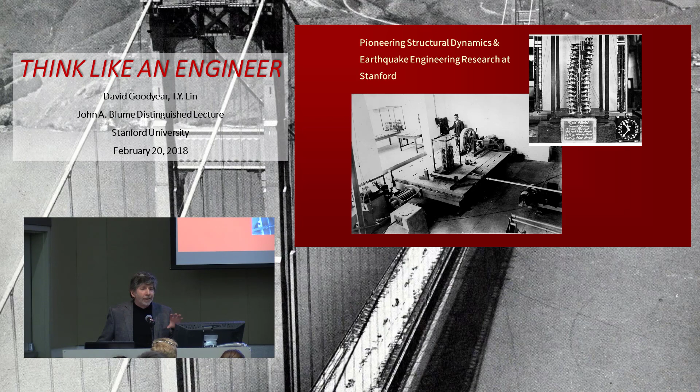And interestingly, when I look back at that shake table, the first applications for that were actually not for structures, but for some of the reclaimed earth that had large deformations around the bay fringes. So some of the earliest studies were looking at what we now call ground deformations and liquefaction. But John Blume, along with a number of other students at the time, worked with a faculty member from mechanical engineering, Lydik Jacobsen, who's really a specialist in structural dynamics, and introduced, I would say, rigorous structural dynamics into earthquake engineering, and also thinking going beyond elastic to inelastic behavior. And if you talk to Professor Miranda, he still goes back to many of the Jacobsen and Blume papers of that era.

As I mentioned, John Blume formed John Blume Associates, which later became part of the URS Corporation. Nowadays, it's part of an even bigger corporation, AECOM. But shown there are just a few of the very interesting structures that Blume Associates were either involved in the design of, or were involved in special studies, particularly aspects related to state-of-the-art earthquake engineering and dynamics, or things that were beyond the ordinary practice. I think in addition to these interesting projects, Blume Associates had a number of alumni, that is, people who worked there as young engineers who went on to fabulous careers of their own.

People like Eric Elsesser, if you know the firm Forell/Elsesser. Eric Elsesser's first job was with John Blume. Someone I worked with years ago in New York, Les Robertson, who designed the World Trade Center. His first job was with John Blume. Sig Freeman, who founded the company, or the office of Weidlinger. So there's this alumni of amazing people that came through Blume's office, in addition to the ones that stayed. Marty Zarnecki and Joe Nicoletti continued to work with John.

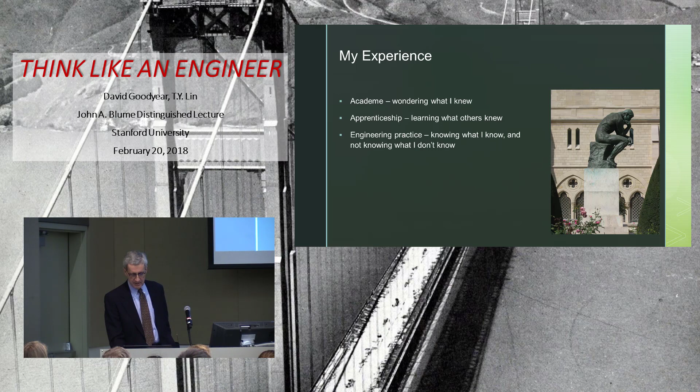I was very lucky to have a mentor when I went into bridge engineering. Actually, I'm a bridge engineer, which is a credit, I guess, to my wife, because I was getting ready to go back to graduate school, and she was not interested in me going to graduate school, so she actually saw the ad in the newspaper that Arvid Grant had. She handed me the ad and said, "Go talk to this guy and see if he can convince you that you don't need to go to graduate school." So, and he did. I went in, I expected to spend a half hour, and 4 hours later I had a new job and never looked back.

He was educated as an architect, a Latvian architect, and he came here after World War II and set up a practice as an engineer. He first worked for the State Department of Transportation, and that was not exciting enough for him, so he walked out the door one day and set up a practice by himself. I remember him telling me that he was a bit naive. He set out a shingle and he thought people would come and knock on the door and give him work, and it wasn't long before he figured out that it didn't work that way and he had to go out and find the work.

He was a brilliant individual, and he probably defied my early example of not doing what you are not expert doing, because he did mechanical design for the timber industry out there. He taught himself to be a surveyor, which is rather arcane practice actually, of understanding local survey rules and things, and he had a survey practice.

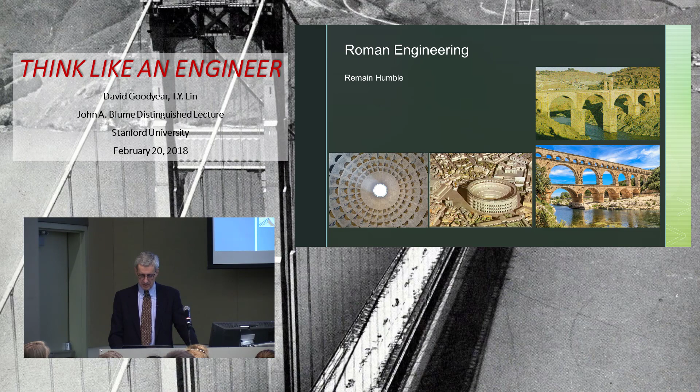Brunelleschi's Florentine Dome is kind of a favorite, mostly because I still look at it as a brain teaser. I was mentioning to some folks at lunch that there are people there even today, or certainly in the last few years, that are trying to build miniature models of the Florentine Dome to figure out how Brunelleschi got a pile of bricks to form that dome, his 35 or 40,000 tons of brick. And simply how being able to build that was a marvel in its day. Brunelleschi was a generation, or at least a half a generation, probably a generation ahead of Da Vinci, and I think

would be probably in engineering circles might be just as well known as Da Vinci if Brunelleschi wrote down as much of his thoughts as Da Vinci did. Da Vinci wrote down everything, and Brunelleschi wrote down nothing, because Brunelleschi was more concerned about somebody swiping his ideas than he was about leaving his ideas for posterity. But if you like a little analytical project, for those of you that like nonlinear analysis, sit down and figure out how you use the efficiency of structural form to make this arch stand up as you're building it up from the bottom with these rings. I think it's a fascinating subject that really teaches you how spectacular these old engineers and craftsmen really were.

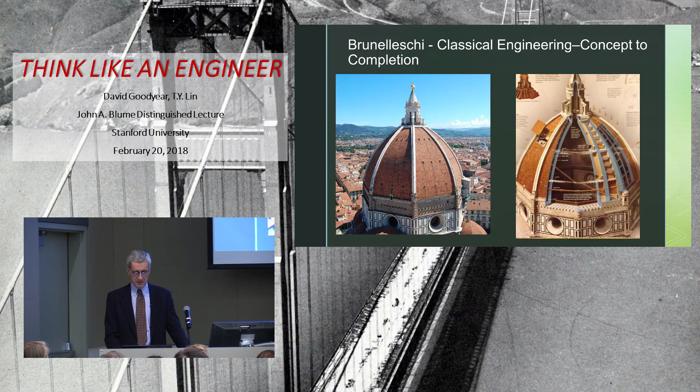And then a little bit more modern, but Gustav Eiffel, and when you look at the Eiffel Tower and you look at that lattice work, realizing the Eiffel Tower was originally built to be torn down. It was built for an exhibition, and they decided they didn't want to tear it down, which is now the icon of France, actually. But the metalwork and the detailing of which is really, from a behavioral standpoint, the tension stiffening that is part of the structure here, similar to his Garabit viaduct. This viaduct he built in about the late 1800s has some lessons even for today. Some corollaries I'll also talk about here in a moment.

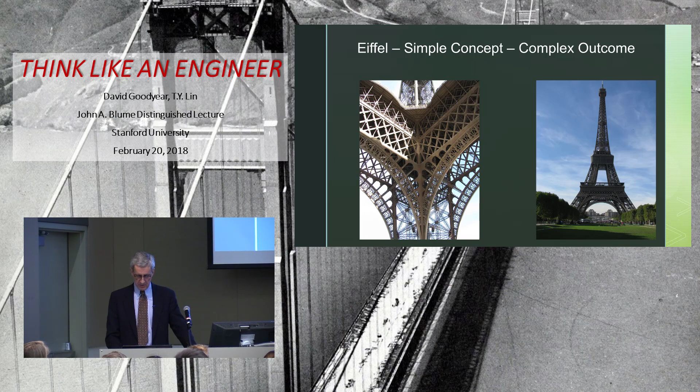As Hoover was being developed, we had a delay in funding that shut the job down for about 2 years after we finished design. And in that time, we put the plans out publicly on the street for contractors to take a look at to get feedback. Obviously wanting to get some input on how we could improve things and make the project more cost effective. We had an outreach meeting once the project started back up, and we had about 100 contractors in the room, contractor staff in the room.

And one of the things when I gave the initial presentation, a few of them had some epithets for me saying that building a 90-meter tall precast concrete column was crazy and that you could never get it straight. Nobody had done anything even half the height, and it was not possible. And I knew this was coming. Had some spies out in the network.

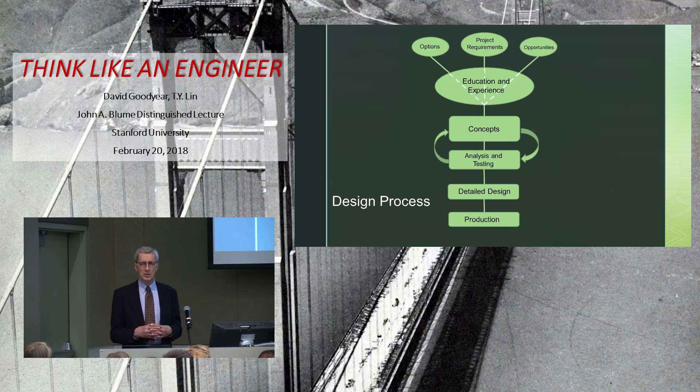At the concept stage, you pretty much defined the economics of your project, of your design, the challenge of difficulty of construction. All of this is really established at the conceptual stage. And then you get into your detailed design. And in your detailed design, oftentimes you'll find out that the assumptions you made in your concept were perhaps a bit oversimplified. And that's where you draw on your analytical and technical capabilities to grind through those surprises, but you're still really developing that product that is established at the conceptual stage. So the conceptual design phase is really where you make or break your project.

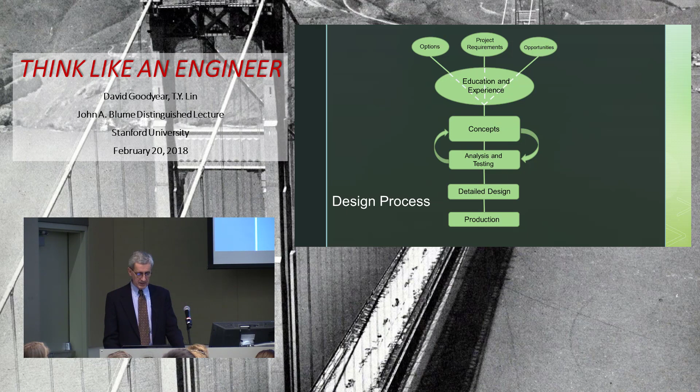Going into some examples, I hope to make the points of this process. I'm going to talk about arches and cablestay bridges because of the long span bridges. That's mostly what I've done. And there are other people that would get up and talk about suspension bridges, perhaps, and other things.

But in terms of arch, of course, an arch is... I explained this. I told Professor Billington I've taught bridge design to 4-year-olds in my daughter's preschool class. So excuse some of the analogies, but arches are like eggshells, and you give a kid an eggshell and tell him to squeeze as hard as he can, and he can't break it. And as soon as he tries to bend it, it breaks very easily. And that's the concept with which you approach an arch design in terms of efficiency. It was the first long span bridge form.

Historically, the bridge on the top in China is 1,500 years old. It's one of the first open spandrel arches, and it's still in service. There are a variety of layouts. The classic parabola is at the top, and the cathedral arch, which is basically an interior pier in the form of an arch, has a compound circular shape, and the funicular curve, or the balance of arches, are load fit. I'll explain the funicular curve in a minute, but all of these shapes are geared towards minimizing bending moment and maintaining the efficiency of form.

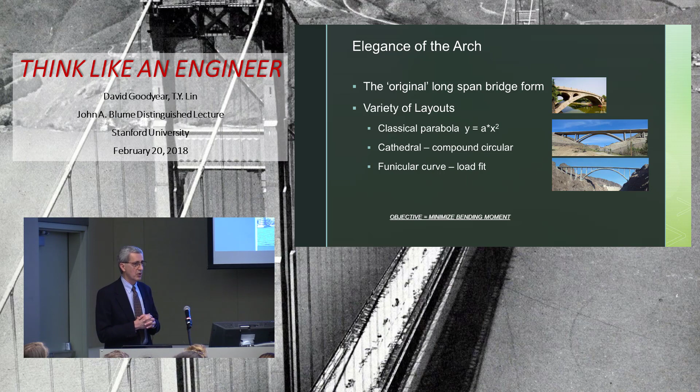In terms of that efficiency, one of the elegant solutions for arches is called the network arch. This Brandanger Bridge on the right is a contemporary bridge designed a few years ago. The one on the upper left was designed by an individual by the name of Per Tveit. He's a professor in Norway who happened to have, I believe it was his cousin, I don't remember, his cousin or his brother-in-law, he told me, but that was the highway director, though they're not called highway directors in Norway, who let him build this bridge because nobody else would.

And he developed this network concept, and the network concept is you have to have each diagonal hanger crossing two hangers, and when you do that, you find that the buckling stability of the arch is enormously enhanced, with the same kind of implicit tension stiffening that you saw in the Eiffel Tower, and basically a system strengthening. If you're disturbing the arch in one area, through displacement compatibility of these hangers, you're actually going to pull the arch and add to the stability of the arch. Because obviously one of the ambitions with a steel arch is to avoid the penalty that you pay in steel for stability. So if you can get the arch rib to be limited by the strength of the steel, then you've got an extremely efficient structural system, which is what he developed.

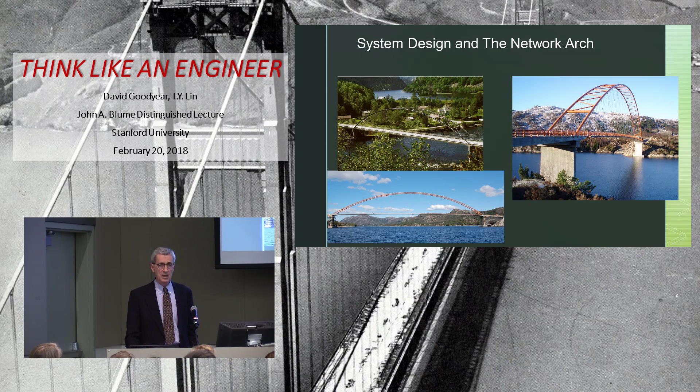Now, obviously, maybe not obviously, one of the challenges with this type of bridge is how do you build it? Because while the network arch is extremely efficient as it's put together, putting it together and getting it out there is another matter. This Brandanger Bridge was floated out as a unit. Tveit's bridge was built on falsework. But in terms of ultimate design efficiency, that system approach, the concept, has been extremely efficient. And there are bigger arches being done. These super light bridges are all two-lane bridges, which obviously you have less demand on a two-lane bridge. But even today, there's quite a number of network arch bridges being built in the U.S. that take advantage of this type of system design.

Going back almost 100 years now to the days of Robert Maillart, he had a very similar system design approach to concrete bridges, where if you look at how slender the arch rib is, you wonder how you can deal with buckling. Robert Maillart, who ran pretty simplified calculations, mostly hand calculations, realized that there's displacement compatibility between the arch rib and the deck, and the deck is stiff enough. The arch doesn't need flexural stiffness, so basically he could design that arch rib as a pure compression member and built the arches in a reticulated fashion. And a modern rendition of that is from Christian Menn on the right, where you can see, just because of the view, the linear elements between the spandrels, the reticulated

configuration, which if you look at, actually the curve on the right is taken from the numbers in the older Professor Billington's book on Robert Maillart. But the principle applies universally. The optimization on the right is simply for a rectangular arch rib and a relatively narrow deck because of the ratio between the influence of the deck and the arch. But on the left, you see that the arch moment ratio depends, no matter if you take this into account and analyze or evaluate your arch as a system, it's a universal principle. Whatever your stiffness ratio is, it drives the moments.

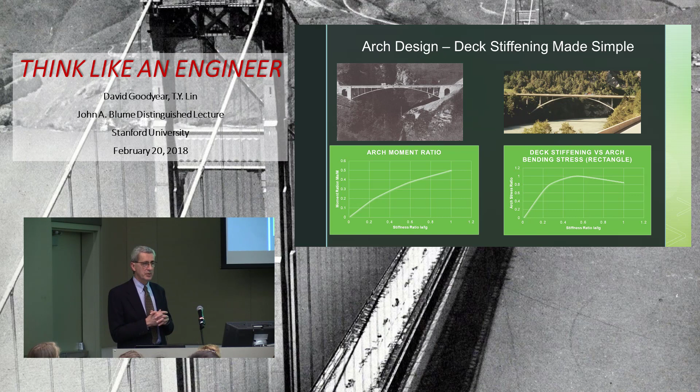So in both of these cases, looking at this funicular curve for a deck arch, it's pretty simple to develop. The equation here is based on assuming all the loads are vertical, but you can modify it for the inclination of the arch. And you're basically following the moment diagram at the point of your spandrels so that you have zero moment from whatever permanent loads you assign, and get a theoretical profile that is free of moment.

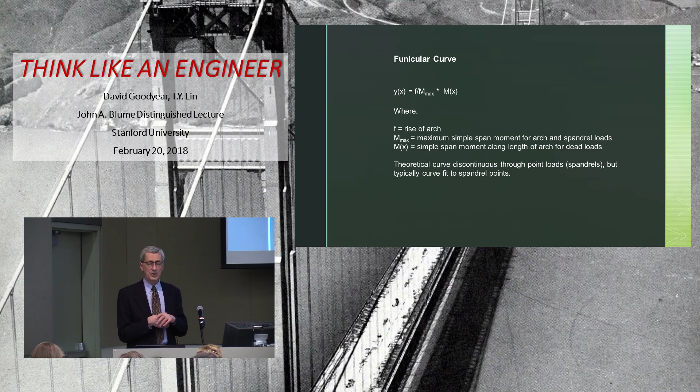Having an arch made out of concrete, that doesn't last very long, which I'll show you about in a minute. But this theoretical curve, for instance, for the Hoover Bridge, which was laid out this way, the arch rib was, for other reasons, quite a bit heavier. So counting the arch rib itself in with the deck and looking at all the weights, the funicular curve varied from the parabolic curve by about 2 feet in certain locations. But it basically was designed to have this same target of zero moment.

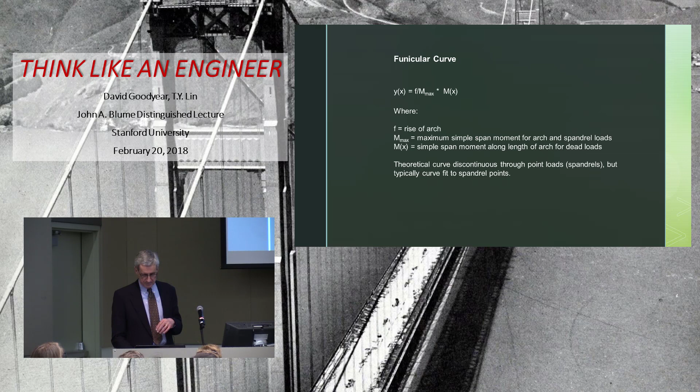In looking at the form and the concept for Hoover, just by way of background to how sometimes you stumble into your answers, the Hoover Bridge was being put together. We were putting together concepts. This conceptual stage was going on at the beginning of the project when the geophysicists, the geologists were out scouring the landscape around Hoover Dam. If you've ever been there, it's kind of like a moonscape. There are just rocks and scarps all over the place.

And the geologists mapped all the scarps for miles around, and they decided that they were going to connect them all with a line and define that as their fault source. And they came back and they said that we could have a 0.7 G earthquake event at Hoover Dam. And I said, well, first of all, Hoover Dam won't be there if you have that 0.7 G event, or at least none of the facilities will. But while I was skeptical, I was also intimidated.

So the clip on the lower left, which most of you probably don't recognize, is actually the tower that I developed for the San Francisco-Oakland Bay Bridge for the Cablestay alternative, which didn't see the light of day, except for the design of these shear links. The tower, for the Cablestay, was developed to have elastic vertical elements and inelastic horizontal elements. So all of the ductility demand would be taken up in these fuses. So I thought, well, I could try the same thing for Hoover, so that if we had this huge seismic event, I'd at least have a mechanism that I could count on as a ductile mechanism, because putting a plastic hinge at the base of an arch isn't the best idea in the world.

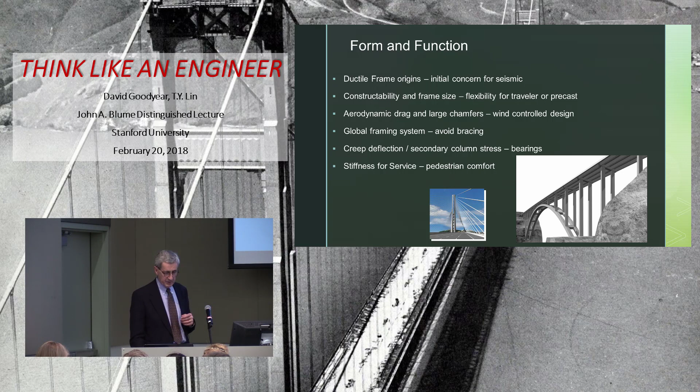There's the last three: the framing system and creep deflection, and the stiffness. We had to concern ourselves with pedestrian comfort, but that was all part of the design here that I'll explain going forward.

The nonlinearity is something I'll mention towards the end, when it comes to dealing with nonlinearity in structural design or bridge design and particularly construction. But the upper right is a quite exaggerated, hopefully, view of the creep in the arch, which is to show the distortion that you get in the columns.

And 100 years ago, when people designed open spandrel arches, if you go back and inspect them now, they all have cracks in the columns. It doesn't seem to bother much of anybody, but today, since we can analyze it and predict the cracks, it bothers everybody. So we put in these expansion bearings to allow the columns to breathe so that we didn't get cracking in the columns.

And Professor Billington actually was giving a paper about the time we were close to being done with this design, talking about a concrete that had high creep coefficient and high creep properties, which would be ideal for this situation. Because the settlement of the arch is time dependent, it takes quite a while, you would just relieve the moment due to creep. But I actually approached Federal Highways about trying that as an experiment, and I was turned away. They said this was too big for a demonstration project.

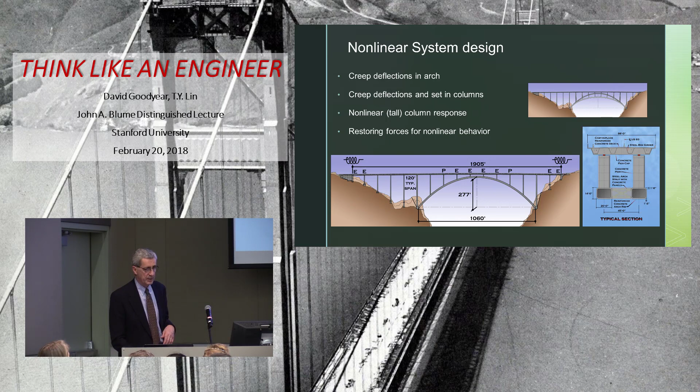And like I say, I'll talk more about that when I get to cable-stayed bridges again, because it's more pronounced in some cable-stayed bridges. Then the deck, there's no bracing in the columns. We didn't want bracing in the columns, so the deck serves as a diaphragm from abutment to abutment to brace the entire bridge, longitudinally and transversely. So we needed to create a diaphragm. So the approach to this was a composite, steel composite deck, and we need to have it continuous over almost 2,000 feet.

The traditional way of doing it would be to build a portal frame and sit it on bearings, but that wouldn't give us the stiffness we wanted, especially the lateral bracing. So we came up with this detail of a post-tensioned shear plate. We didn't use a steel cap because in the bridge community you have something called fracture critical design: if you have an element that, if it fractures, would cause collapse of the bridge, there are a lot of special rules and special expenses that go with it, not to mention the inspection that has to take place every 2 years. So we opted for a concrete, post-tensioned concrete solution.

So then we had to connect the boxes to the cap, and this connection on the lower right is what we came up with, which is a serrated plate, which I'd actually used years before for a very heavy construction load. Shear friction with a steel plate to concrete has good, reliable numbers, if you clean the steel plate. But if you're out in the field and somebody gets oil on the plate or something, there's some concern about how reliable it is. So we had this serrated plate, which worked exceedingly well. And when I used this in the past, you actually could take the PT off of there. There's a draft on the cap so that even if the PT disappeared, the connection would still hold.

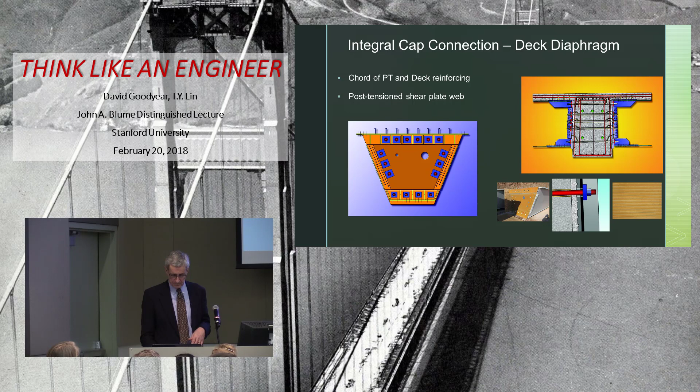In terms of tuning the arch, most arches, even a lot of steel arches, classically when you're ready to close the crown of the arch, you'd put jacks in and jack the crown apart. That's to try and target something closer to a zero moment at the springing, because arches don't like moment, and the efficiency, the material you need to put in, can be excessive.

Actually, it's not entirely clear that even for cast in place arches you really need that always. But here, that was something the reviewers, the Federal Highway people, commented on at the beginning. Since we erected this with stay cables, we could control the moments in the arch rib by tuning cables, and it was pretty easy with these backstay cables, the ones from the tower going back to land, to just pick the whole arch up and pre-camber the moment into the springings.

So we could control that moment, recognizing that creep in the concrete will always creep towards the final statical system. But this was 10,000 PSI concrete, with very low specific creep, a very low creep coefficient. So whether we were fooling ourselves or not, we thought we could pre-camber this and predict that we could target a zero moment. We used a higher creep coefficient than we got out of the testing, so we probably have a positive moment instead of a negative one, but we were designed for that envelope.

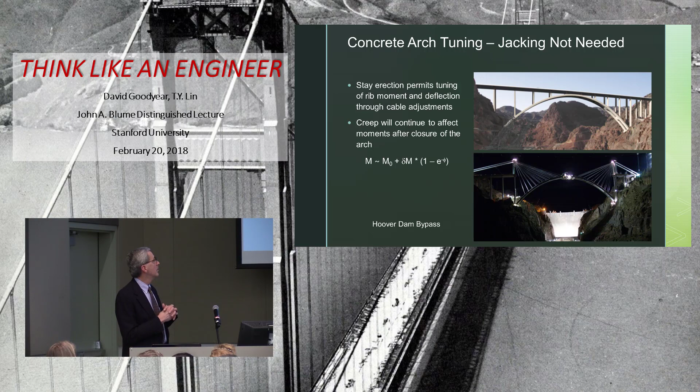This is an earlier arch that we designed in Oregon that also used cable-stayed methods for construction. There are two points I want to make about this. First of all, the integral crown, which is a feature of this arch, would have helped the stability of Hoover perhaps somewhat, although the springs were sufficient in the end. But what we learned on this smaller bridge was that it cost as much to build that integral crown as it cost to build all the rest of the arch.

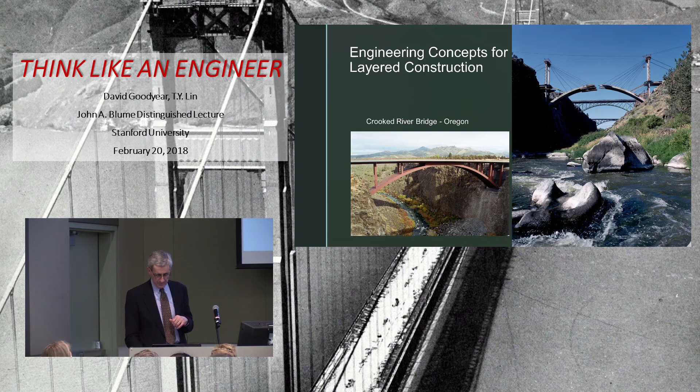So when we got to Hoover, we purposely avoided it. If Hoover would have been a longer span, which was one of the options, we would have needed an integral crown for bracing the arch rib, but for the span we had, we didn't need it. So we had reasons to prefer an open spandrel for Hoover.

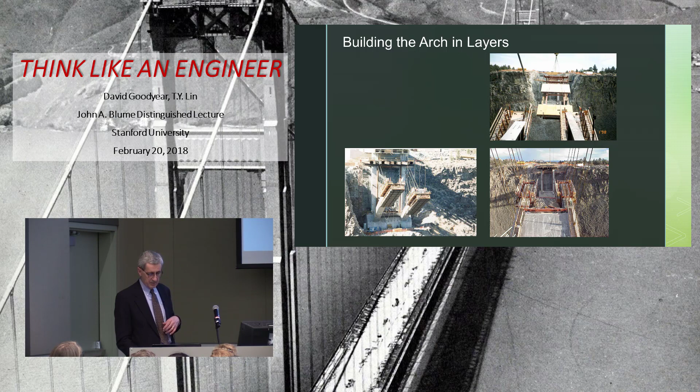But this arch was built in what I call layers and successive castings. It was a trough section with two edge girders and a connecting slab. The arch ribs were built first, the two edge girders on a form traveler with cable stays, and then they just flew in the forms and built the slab later. So if you're looking at it analytically, you don't have the whole section. Again, concrete is time dependent, very age dependent. You don't have the whole section all at once, and you have to figure out how to evaluate the stresses and demands in that type of construction, which I'll highlight at the very end as to different ways of looking at that.

And moving also to cable stay bridges, which again I think fit the theme of thinking like an engineer and making things simple. The cable stay bridge, while it can look complicated, is actually quite simple, probably simpler than an arch in a lot of ways. The analytics of it are complicated because of the high indeterminacy, but the concepts are pretty simple.

There are two approaches to cable stay bridge design in terms of the deck. There are flexible decks, with concrete edge girders like Dame Point and concrete cross beams. Sidney Lanier is that way. There's composite, which is the most popular in the U.S., which is a steel frame system with usually precast decks on the top. And then there's a box girder like Sunshine Skyway in Florida that behave quite differently. The lower one is Kap Shui Mun in Hong Kong, which has a train in the middle. So if you have a train in the middle, you're going to have a double deck. You're going to have a stiff box.

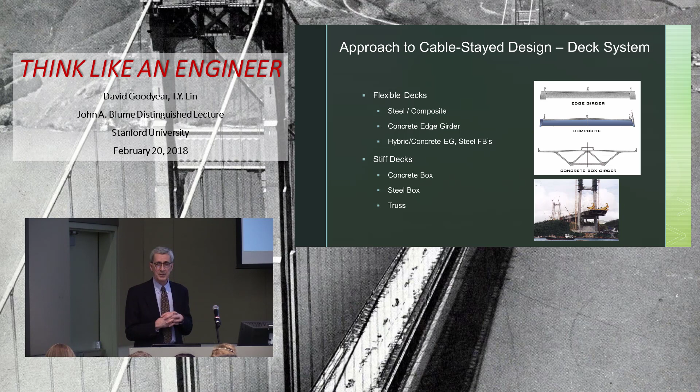But what you have in terms of the merits is that the conceptual approach to the flexible bridge is that the cable in tension is the most efficient element, and you want to maximize the use of that cable and what that cable can do.

The concept with the stiff bridge, with the box bridge, is that you want to actually minimize the demand on the cables and use the properties, the torsional stiffness, for instance, of the box, and the flexural stiffness of that box spreads out, concentrated. If you look at the fatigue demand on the cables on the right versus the left, the fatigue demand on the right is less than half of what it is on the left.

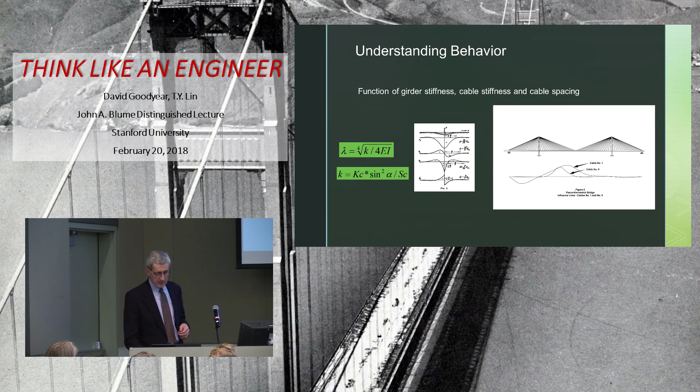Again, with nonlinearity, and this is the main point in terms of dealing with nonlinearity that I want to make. The classical approach to analysis that I'm sure you all use is you develop a stiffness model and you apply forces, and out of that you get stresses and moments and deflections. That's the classical way of looking at an engineering analysis problem.

With a flexible steel bridge that you have to analyze all the way through construction to know where you're going to end up, that just doesn't work very well, because first of all, you might have in the jacks, where you think you're putting a load into a cable, a 3 to 5% tolerance on your jack readings, and you have a very flexible system. And actually in the limit, it's like a weight on a string. If you have a weight on a string, you can pull that string up and down as much as you want, and the tension in that string doesn't change at all.

And that's what happens when you try and erect a flexible steel bridge with forces, is you can't control the deck. So you really want to go into a nonlinear system and turn things around a little bit and control it by displacement. Whether you're dealing with a nonlinear column that is guyed off or tied off, as it was in Hoover, or you're building a flexible bridge, you want to control it by deflections, because as I'm sure you know, if you know the unstressed shape of all the elements in your structure, and you know the stressed shape of your final structure, for a linear material, you know all the stresses in the structure.

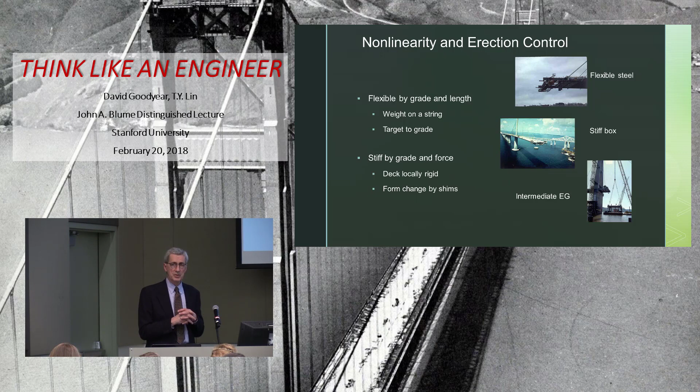Conversely, for a stiff box, you can't move it from its unstressed shape. As it goes together, you need to erect that by force, because if you tried to use the same methods you use for a flexible steel, you'd break the cables. So if you have to make geometry corrections there, it's quite different. With a flexible steel bridge, you can pull it around quite a bit. For a stiff concrete bridge, if you have to change it, if it's cast in place, you have to change the form traveler, or if it's precast, you have to use shims.

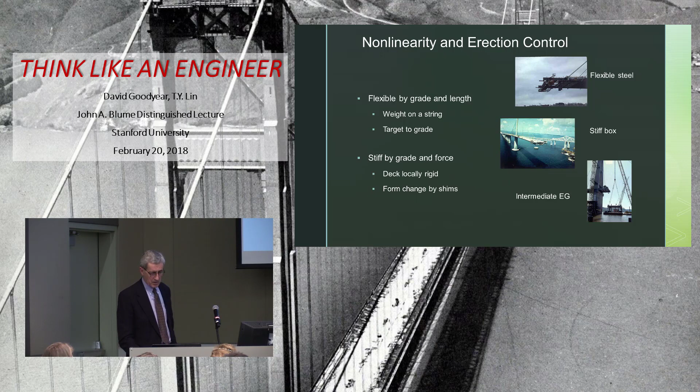Moving on to another project, the last project here is Port Mann. This is a bridge that we did a while ago up in Vancouver, BC. And again, trying to explain how we got to the solution that we arrived at was pretty simple. In fact, embarrassingly simple, actually. This is the layout of the bridge, and up at the top, I hope you can see there are two lines, which was the old bridge.

This was a project where the criteria was they wanted 10 lanes crossing the river. And the concept that the owner put out, this is a P3 or bid as a concession project, the owner said, I want 10 lanes when we're done, and the concessionaire, you have to take care of this for the next, it was 35 years, counting construction. So you keep the old bridge as long as you maintain it and build a 5-lane new bridge.

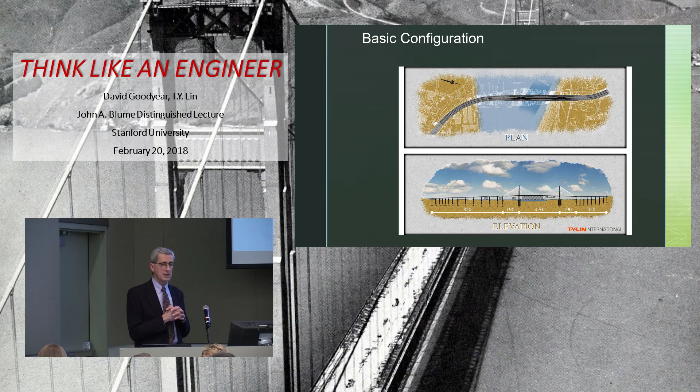Well, we had right-of-way for 5 lanes, and we had to stay within the right-of-way. It would have taken us years to get additional right-of-way and millions of dollars, hundreds of millions of dollars. So we came up with a single tower solution, the purpose of which was to get that footing to fit within the right-of-way. And that's the sum total of the logic behind that concept of building 2 bridges and hanging it off of 1 tower.

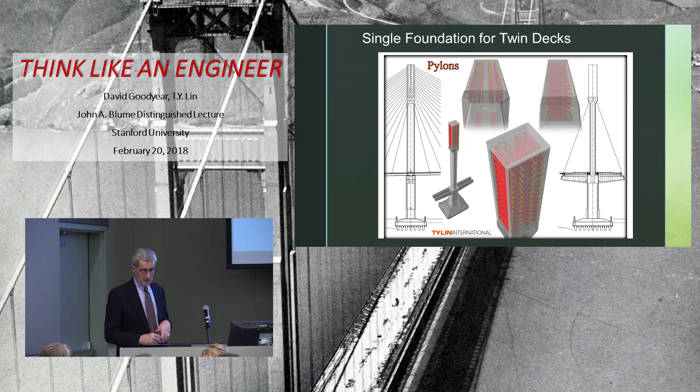It was an interesting exercise to design the tower for 4 cable planes. The geometrics had to change. The tower had to be taller to get traffic underneath the splay of the cables. And there were a couple other interesting engineering items that we had to take care of. But it was basically pretty simple, just 2 decks supported off the same tower with a strut in between to take the splay forces out of the cable, and everything else was very normal. That's why it was bid very competitively, because this was all something that a contractor had built before other than the tower.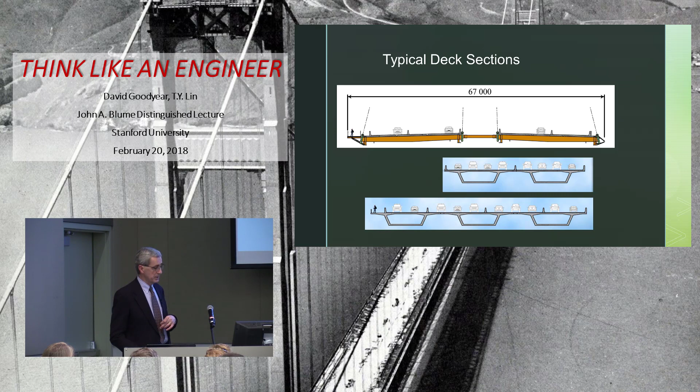And off the ends of the bridge, the approaches are precast segmental boxes, so we split it into 3 so that the 3rd box we could build after we tore out the old bridge, because at the tail ends of the bridge we overlapped with the old highway and ultimately had to maintain service throughout the construction period.

But one of the details that had to be attended to that is somewhat different is the stay anchor for this bridge, for the outside stay anchors. There's 2 types of anchors. Again, this is just like the difference between a slender deck and a stiff deck. There's a semi-religious affiliation with some of these stay anchor types. And the top 2 anchors are called fin-type anchors, where basically the web plate of the edge girder is extended up, either welded onto or bent plate or continuous plate.

The lower anchor, we call it a bucket anchor on the outside, is either a pipe or a steel box that we bolt on to the outside edge girder. If you had to, you could take it off and replace it. But the main issue here is that these lower anchors have to be stiff enough to mobilize the damper on the stay cable. Because if they're too flexible, the damper will just shake with the cable. So you have to generate motion within that damper in order for the damper to work on the stay cable.

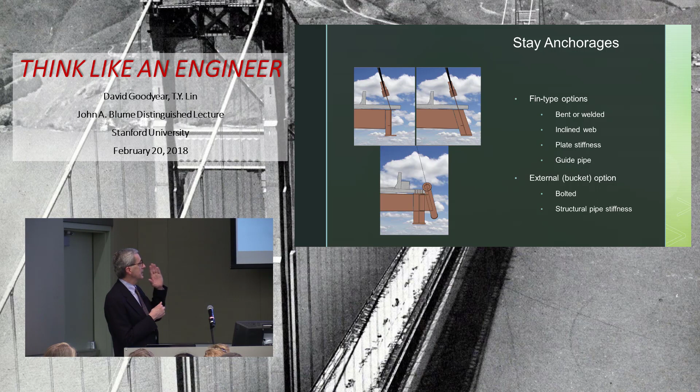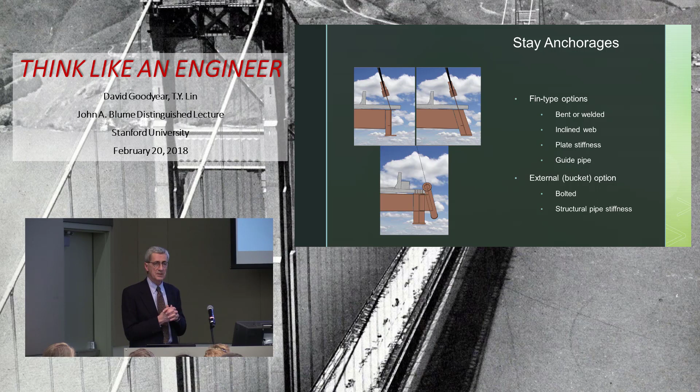And certainly in the plane, where you have a vertical cable plane and the motion you're damping is within the cable plane, that fin anchor works just fine. But if the motion is out of plane, it's not very stiff. So the bucket anchor's stiffness is two-dimensional so that you have sufficient stiffness all the way around.

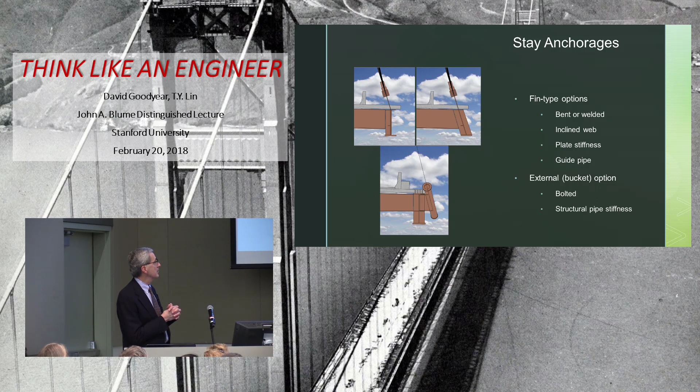One other point, a corollary to that really, is that when you look at the cable plane, which is tilted in to meet the tower, the change in sag is always vertical. And so you have out-of-plane movements, and with a large splay like we had on Port Mann, this can actually put a lateral component on that plate, which, like I say, is buried in concrete that you can't see. And so if you had any issues, fatigue or otherwise, it'd be a bad day when you found out.

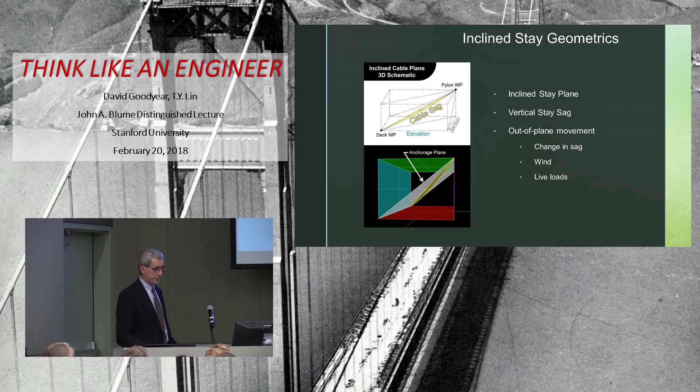So one of the things in closing here is the notion of an old man's advice to young students, which is to really think for yourself. One of the things you'll be dealing with if you get into the design world is codes and standards. And the first point is that codes really don't help you design at all. Codes are used to validate the design that you come up with, but they don't help you get there really.

Certainly the background in knowing and understanding codes and having experience is going to be part of that bubble that I mentioned, that knowledge and experience, but you're not going to find anything, at least for these types of bridges, in a code that says this is how you should design this bridge. They're focused more on conventional designs, although of late they're becoming far more voluminous. That picture on the left is a little bit more than half of the Eurocode. We only buy the part that applies to bridge design. The picture on the right is the AASHTO code, which is also quite voluminous.

This is one of the handicaps of modern technology, because now that you can carry the code on a thumb drive, I think people are less inclined to make the publication efficient. But they're basically methods-based specifications that seek to tell you how to do everything rather than what you should achieve at the end of what you're doing, which would be a performance basis.

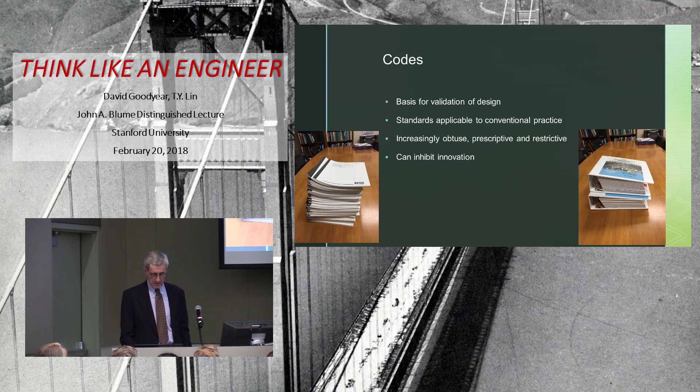In terms of items of caution, just by way of example with codes, realize that when you're using the code, it was based on the best evidence of the code writers at the time, and that input was probably at least 5 years before you're using the code, because of the cycle on a code. 5 years is fast, actually. And you have to be cautious about blindly applying codes in all situations, especially when you're looking at unique aspects of design. And here are a few examples I'll run through quickly here.

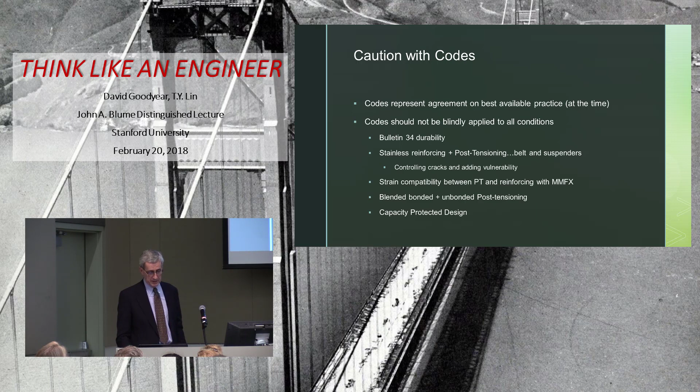The first is durability. Durability is underappreciated in the U.S. Bridge Code. People are paying more attention to it now. The European codes are more developed in this regard, and one of the standards that's found its way into the Eurocode and elsewhere is this FIB Bulletin 34.

The premise of that, as it's applied worldwide, is that if you design to the balance of the model code, you can apply these reliability-based forecasts of your service life, the methodology of which is in Bulletin 34, and that you'll have a durable structure that you can forecast with some reliability the service life. That Eurocode, the general provisions allow for generally a crack width of anywhere from 0.2 to 0.3 millimeters.

The crack that you see on the right is about 0.12 millimeters or 0.005 inches. So the crack that you're allowed in the Eurocode, at least under the practice of this, is about twice as big as the crack that you see there. And this crack got the attention of everybody. A crack twice this size, I think you can look at it for yourself and appreciate that chloride-laden water is going to get into that crack.

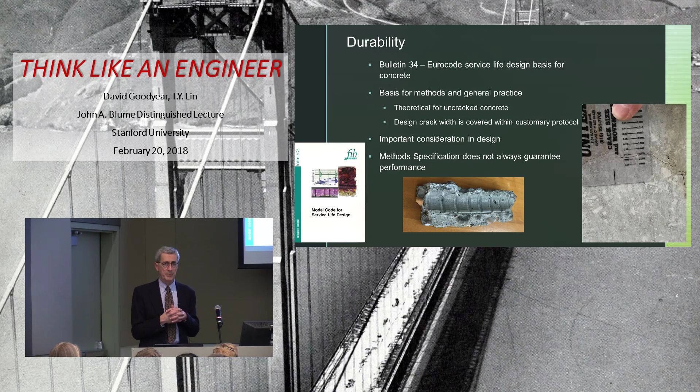Another example of an aspect of caution with the codes is that there was a time here in California when precast segmental construction was being introduced. It is most efficient at times to have external post-tensioning that's not bonded, except at deviators sometimes. And so there was a rule promulgated that if you had a precast segmental bridge, at least half the steel had to be bonded, and you could have the other half unbonded. Well, you do a strain compatibility analysis, and pretty quickly you realize that before you mobilize the strength of that external steel, you're going to break the bonded steel.

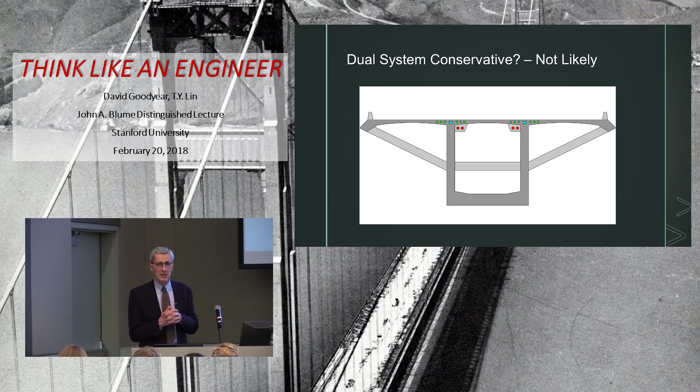So it was a very incompatible system that was stipulated at the time, which soon after Frieder Seible at UCSD pointed out from his testing was not a good idea. That was dropped, but it was in the provisions for quite some time.

And then being the Blume lecturer, I have to say something about earthquakes here. So, again, one caution about application of codes, the AASHTO code in particular, the AASHTO guide spec. There's something called capacity protection that we do in bridge design that I don't know has a corollary in building design necessarily, which is to say there are certain elements, principally the foundation, that you don't want to go inelastic. So you design what's essentially a fuse in your structure so that all your inelastic behavior is outside the foundation zone. And you apply a strength increase factor for your material properties. So that's the basis for your foundation design, and the fundamental, universal basis in the AASHTO guide spec for seismic.

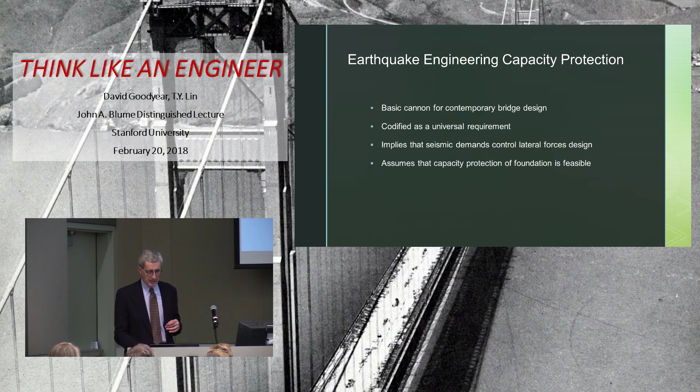The presumption is that lateral forces control your design, which, of course, on the West Coast, certainly in California, they do, but they don't everywhere. And it also assumes that this capacity protection is feasible. And if you look at the history for ductility-based design, the principle, I'm sure you're all aware of, is that your inelastic displacement demand is going to be about the same as your elastic displacement demand. So you can look at these elements and you factor your demands, if you want to, your displacement demand, and refine your design on these fuse elements so that you have what you see as a safe design because your foundation is essentially elastic.

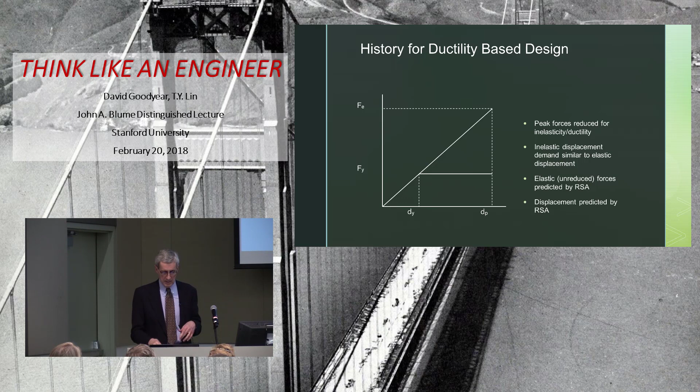The rub comes in when you have a big bridge like Port Mann or other big bridges where the basis of your design is controlled by wind. And so if your lateral forces are controlled by wind and yet you still have the same criteria, you have to apply your overstrength factor to a design. You obviously don't design for wind inelastically, you design pseudo-elastically. You have a factor applied to a design based on wind, and you can very easily require double the foundation design in the best of circumstances by having to apply this capacity protection to a design that's reinforced where the main reinforcement is sized for wind. So we try, and frankly, very few jobs, you start with this discussion at the beginning of the job, and very few of these big bridges have been subjected to this, but it is a challenge to convince agencies what you need for rational design.

An example that carries this further is, again, this Port Mann Tower. Again, the principle of superposition for these big bridges, when things are nonlinear, which they're fundamentally nonlinear really when you look at the progression of liquefaction, you really can't analyze to get your moments and forces and apply a factor to it. It doesn't make any sense. The rational approach is to apply some multiplier, if you will, on the ground motions and see how the overall system behaves. So what we do actually routinely is run a nonlinear time-history analysis with moment curvature definitions and soil properties that reflect the progression from non-liquefied to liquefied conditions, and where we need to look at a margin of safety, we apply that margin to the ground motion.

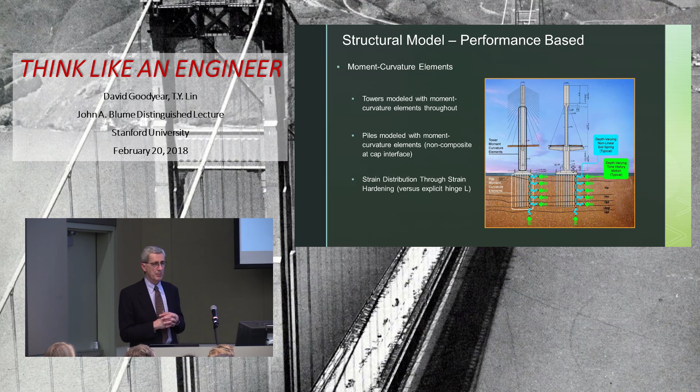The other point to be made here, by the way, and you could tell by visually looking at this picture, again, the notion of thinking for yourself, if you're the designer or the owner of that bridge: there's no torsional stiffness in this deck. I would say that the last place you would like to see a plastic hinge is at the base of that column. Because unlike a conventional girder bridge where you have stability afforded by the balance of the bridge, here, if you have inelastic response to that column, you're basically going to blow the bridge up when you're done. You'll have a residual drift that'll be, hopefully the residual drift is not as tall as the tower, but you'll have a condition that you just can't recover from. So we advocate for designing these, we detail them for confinement, just as though it were a capacity protected design, but we look at the entire superstructure and substructure system as a unit.

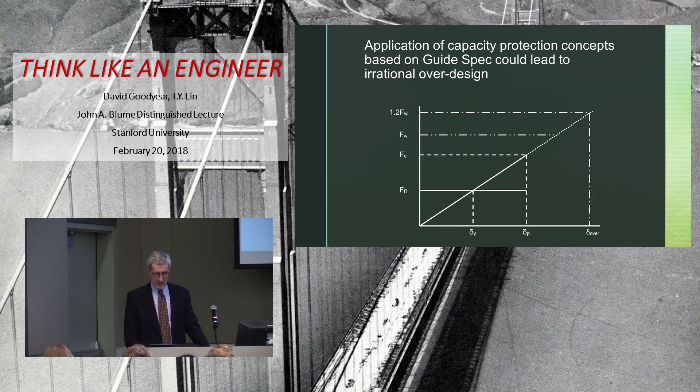But there are specialized analysis routines that are needed for some situations that the general purpose programs don't do a good job with. And I'm still cautious with cradle to grave design algorithms. As a matter of course, we never design using one set of software anyway. We use multiple software to have checks and balances. But there are certain things in software that, until very recently, I know of that were quite incorrect, this being

one of them. I mentioned this layered system, and I know you all, once you got through your first statics class, realized that you formulate a stiffness matrix by taking your element and applying your unit displacement and looking at the forces, and that's your stiffness matrix. Well, if you are using a general purpose program or even a special purpose program that had this link system on the right internal to the program that you might not know about, what you have is I1 plus I2, and that doesn't equal I gross.

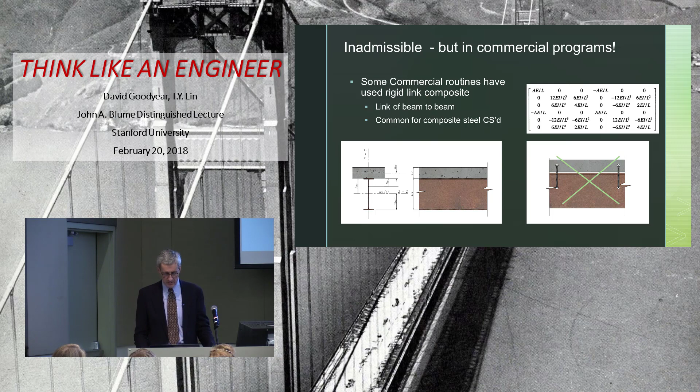I know of only one that's still out there that might entail this kind of problem, and the main international ones all have very good, robust algorithms. But this is the type of thing you have to read the technical manual that comes with software and understand what they're doing. And if you don't understand what they're doing or they don't tell you, you're probably better off buying a different program.